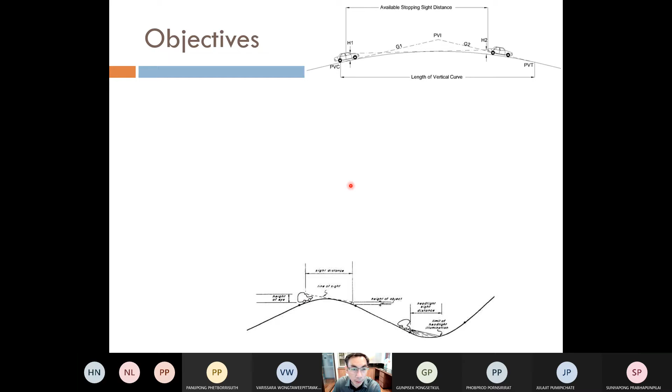Okay, describe the component of vertical alignment. What does it mean, the vertical alignments? It means when you drive the road, there are two kinds of alignments. The first one is horizontal curve, left and right, and another one is uphill or downhill. When you're changing the gradients, we call the gradient slope uphill or downhill, we call this one gradients. We use the G, okay?

For example, G1 is this car driving uphill, and they want to change to downhill, okay, G2. They change the gradients from G1 to G2. Rather than make it abrupt, for smooth traveling we just put in a curve. This kind of curve uses the parabola curve to connect between these two straight lines, the two gradients G1 and G2. We use the vertical curve by applying the parabola's equation.

So the objective of this topic: you should be able to describe the component of vertical alignments, understand the design criteria for vertical curve, and determine the minimum length of vertical curve.

When you have a longer length of vertical curve with the same changing percentage of gradients, compared to changing from G1 to G2 with a shorter length, you'll have a difference in sight distance. If you have a shorter length, you have a shorter sight distance. But if you have a longer length, you will have a longer sight distance as well.

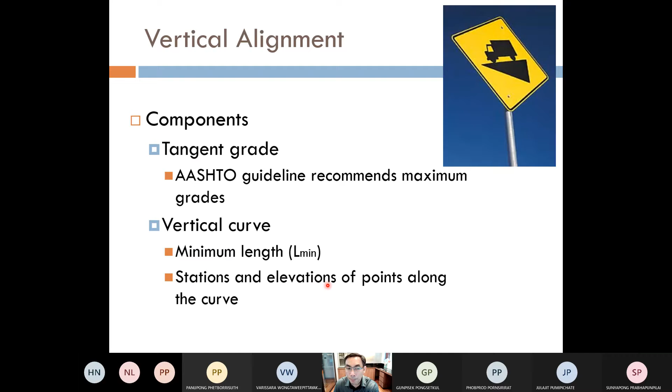Let's have a look at this picture. What do you think about this picture - do you know if this is downhill or uphill? They turn, of course they turn right. Okay, the vehicle goes straight from here, turns right, but is it uphill or downhill? Can anyone give me an idea?

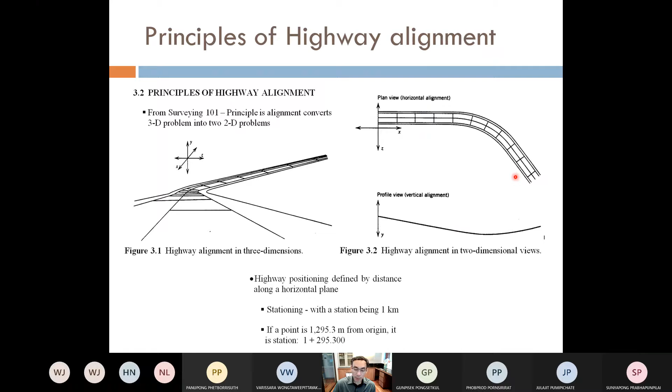The station of the vertical curve goes all the way on the x-axis, but the station of the horizontal curve goes along the curve itself. Therefore, the length of curve also represents the station along the horizontal line here. Any questions so far? Yes, in this picture, length is measured along the horizontal plane.

This is G1, the initial grade, and G2, the final grade, or final tangent, whatever you call it. The A absolute value is always a positive number because it's put in absolute value.

PVC is point of vertical curve, the beginning of the curve. PVI is point of vertical intersection, the point where they're changing the gradient. PVT is the final one, at the end of the vertical curve. Please keep in mind that this is a parabola, and after this point it goes to a straight line or tangent.

L is the length of curve in station, normally measured in meters, measured on a constant elevation, constant plane.

From this picture, the gradient 1 or tangent 1 here goes uphill, and the second tangent is tangent 2 or G2. You put the first curve here. This is a crest or sag curve.

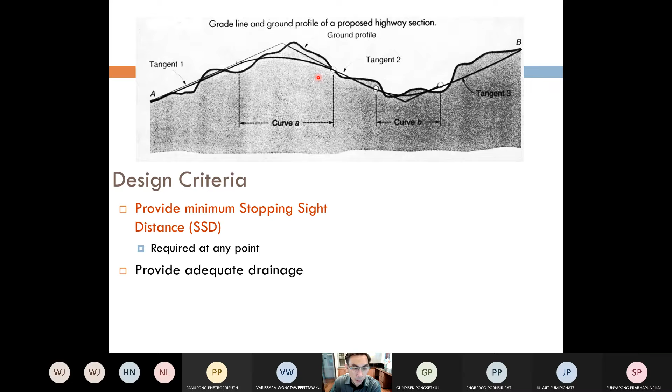Of course, stopping sight distance required at any point of vertical curve, provide adequate drainage, provide comfortable riding, provide pleasant appearance, natural topography, and environmental, also the good view. Okay, also related to the horizontal curve as well. The balance, you know, uphill, downhill, we have to cut earth and fill earth maybe quite equally. That is would be care.

Here, the example to find. You can see the line here. You have the solid line here, and you have the dashed line here. Okay, if you have a solid line, make sure that you cannot overtake it, but you maybe have enough distance to stop the vehicle before hitting the object.

How can we know that? It can be, if you drive the vehicle here, this is the driver eye height, okay? The height of maybe 3.5 foot above the surface. And they have another object. The object may be, they support the car stopping here, broke down vehicle stopping here, or the traffic jam here, behind the hill. You have enough distance to stop before hitting them. That's why they make the distance here 60 centimeter or 2 foot object height, okay?

And this is the sight line, okay? The line of sight that you can see the object. And the distance left here should be long enough for stopping vehicle. Suppose that your design speed of this road equal to 100 km per hour. If you drive with 100 km per hour, you open the table, how long does it take to stop the vehicle? It's 185 meters. So the distance left here should be minimum, or the length of curve should be long enough to have at least 185 meters on this curve. That should be enough for vehicle to stop before hitting the object.

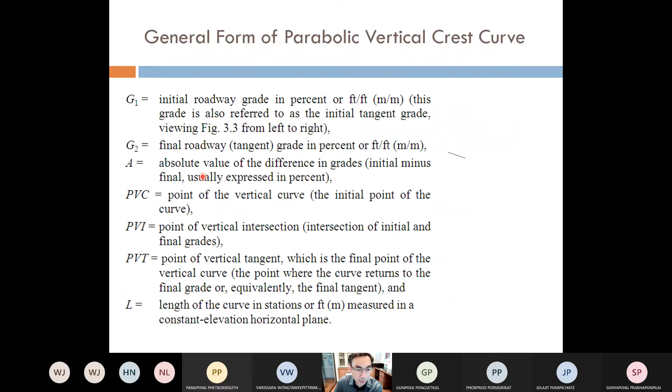For example, y is the elevation of any location or any station or anywhere, referenced from the beginning, PVC, okay? We start, let me see from here, from this picture. If we start from here, x equal to 0, okay? Along the horizontal plane, x starts increasing. When you want to know the elevation of anywhere, you put x in the equation, you will know the elevation from y equals ax squared plus bx plus c, okay? But the problem is, what is a, what is b, and what is c? That is the coefficients defined below, okay?

If you notice, we have the state right here, and then we start. The first point we call PVC, right? And what is this point? We call PVI, and we call this one PVT, correct? And we start putting the vertical curve here. My question is, if we start here, this equation y equals ax squared plus bx plus c, what does c mean when x equals 0? It means PVC, right? Elevation of PVC. Is that correct? If x equals 0, c equals y, and y equals elevation of PVC. Is that correct?

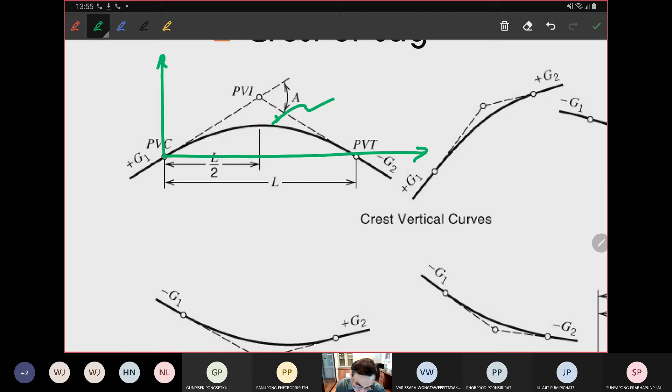Let's see this one, okay. This one is a parabola curve, right? Y equals ax squared plus bx plus c. This is x equal to 0, right? And the length of curve is L. I said if you want to know when x equals 0, y equals what? X becomes 0, what is the point?

Here, c. What is it? It equals c, right? If x is 0, c equals y, y equals c, right? Yes. Y equals c. And what does y mean here? Y means elevation of PVC.

That is the value of elevation of PVC. So if you know the elevation of PVC, you know that is C.

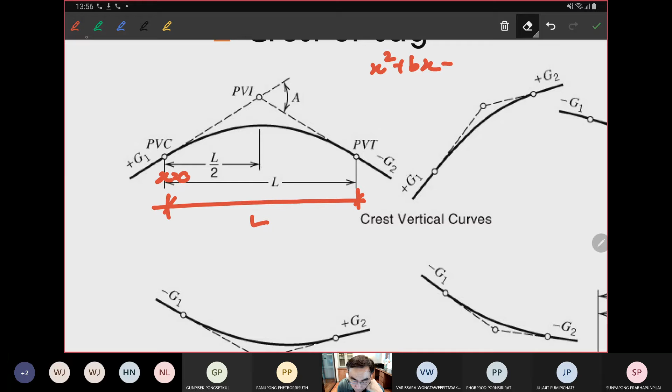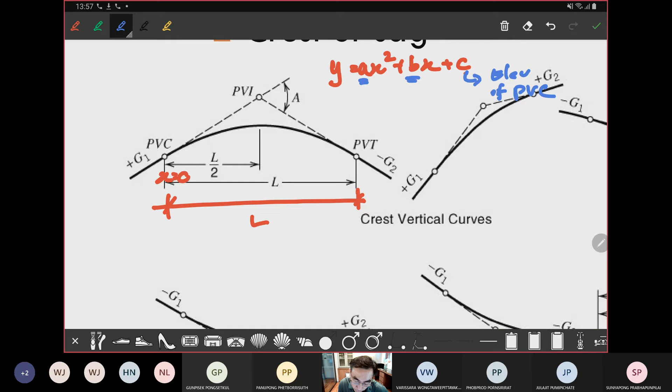C equal to elevation of PVC. Right now we want to find A and B. What does it mean, A and B? In the parabola, the slope - you know in calculus, first differential equation, what does slope equal to? dy by dx, right? And how can we find B and A? How can we do that?

How can we do that? I ask you, the slope here, dy by dx when x equal to 0, equal to slope, right? So at this point you know the slope. At this point, PVC, slope equal to what? Equal to G1.

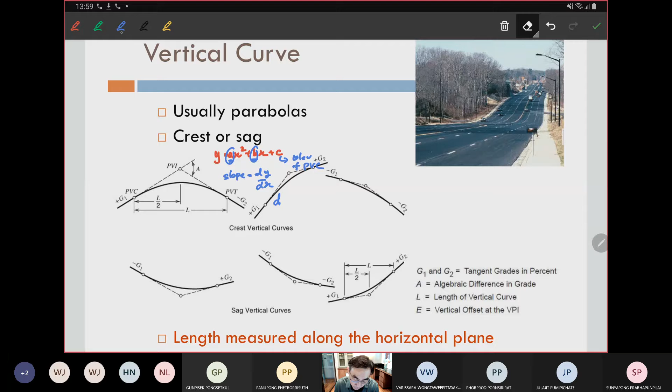If you can see from this slide, it's straightforward. Okay.

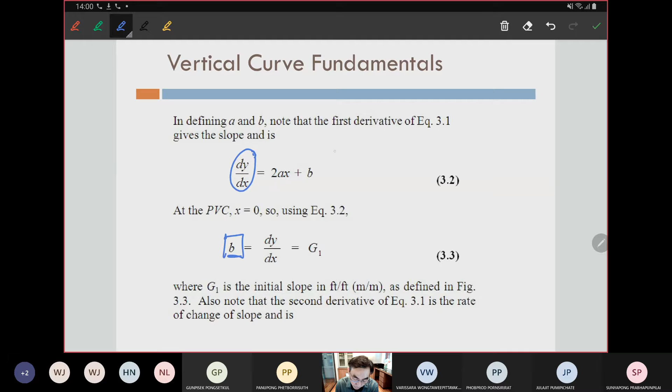You know the first one, C must be equal to elevation of PVC. We know C when x equal to 0, C equal to elevation of PVC. When we want to find out what does B mean, we just find the slope of the parabola curve. When we first make a differentiation, you will get 2ax plus b must be equal to slope, right?

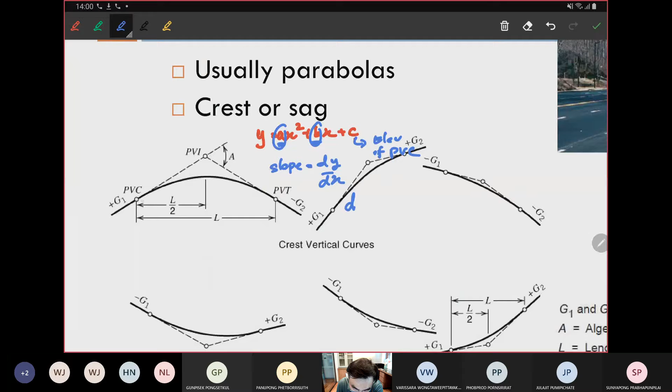If you see the slope here, you know only one point in the parabola. This point means what? This slope dy by dx equal to G1, and G1 equal to what from the first differential equation? 2ax plus b, at this point x equal to 0, so b equal to G1. The value of B will be equal to G1.

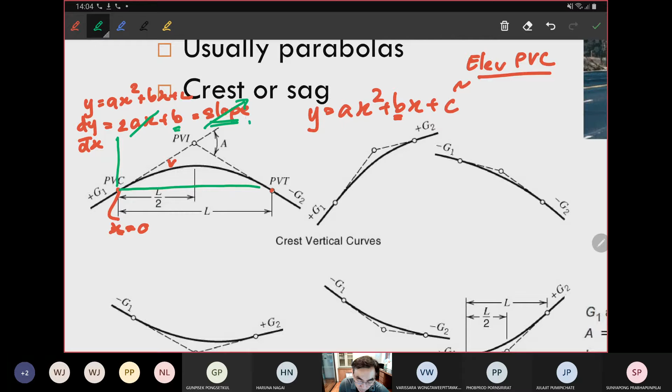Okay, so now we know B, we know C, we need to find A. We find B by using the slope dy by dx. But how can we find A is a little bit more difficult. We find it by using the second differential equation.

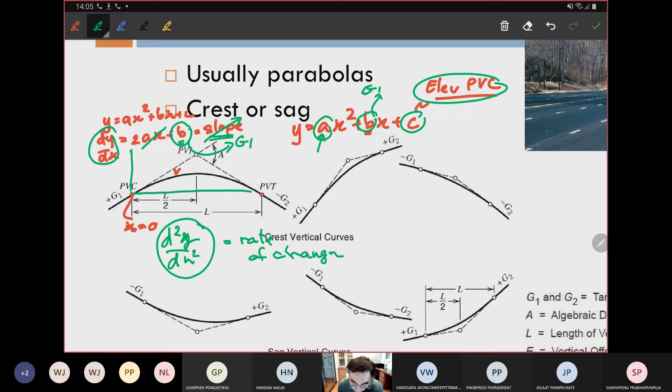dy by dx, differentiating twice - what does it mean? The second differential means rate of change, equal to rate of change in gradient. Differentiating twice, what's left is 2a. Rate of change means the change in slope, which is G2 minus G1 divided by the length. This is the rate of change of slope.

Compared to the range of the curve, this is the rate of change of slope, equal to 2a. Therefore A becomes G2 minus G1 divided by 2L.

So we come back to this page. B equal to G1. Okay, and the second differentiation equal to 2a, which is the average rate of change of slope.

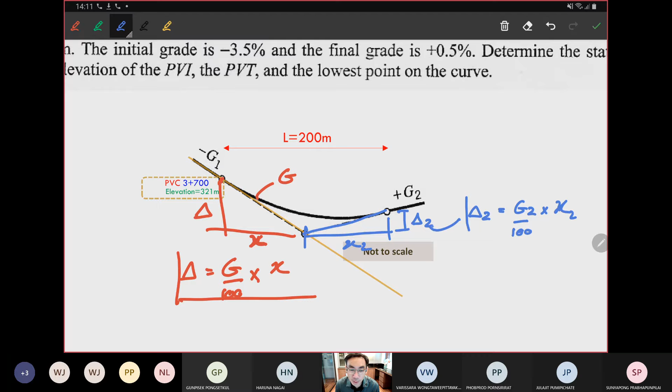Right, the blue one. If you want to know the difference in elevation here, delta 2, right? Delta 2 equals G2 divided by 100, multiplied by x2, the horizontal distance. You will get delta 2. Keep in mind this one, we use this a lot. Of course we will use this one in exam questions too.

So now you know this equation, parabola, for finding the elevation along the vertical curve. Let's start doing the first example.

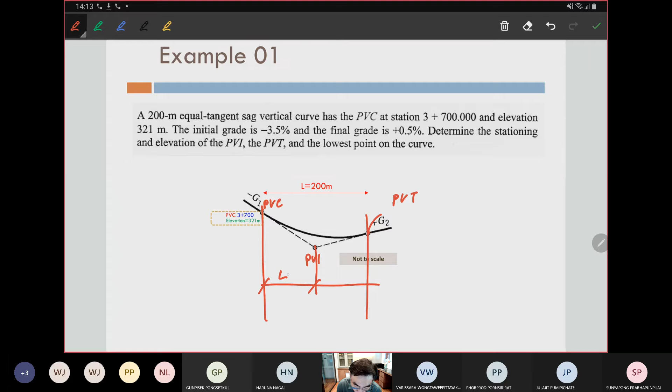Two equal tangents, yeah, let's add a bit more. We calculate this one, we say equal tangent, what does that mean? Here the start we call PVC, this is what we call PVI, and we call this one PVT. The equal tangent, from PVI to PVC equals L divided by 2, from PVI to PVT also equals L divided by 2, it's equal. This total L, reference from PVI to PVC equals the length of curve divided by 2, it's the half of the total length.

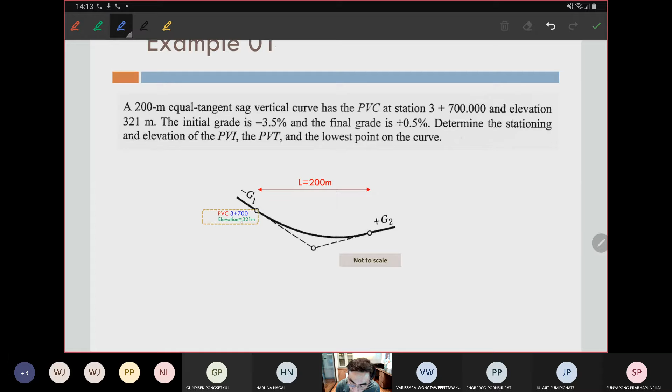This question: 200 meter equal tangent vertical curve. We have PVC station at 3 plus 700 and elevation is 321. The initial grade is minus 3.5 and the final grade is plus 0.5. Determine the station and elevation of PVI and PVT, and also the lowest point of the curve.

From this, very easy, I want to know the station of PVI and station of PVT. Anyone want to answer? Raise your hand. Who wants to answer the station of PVI and PVT? Can you find the station of PVI and PVT please?

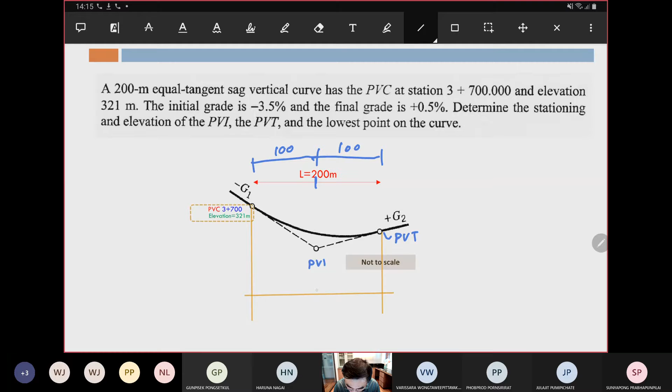No one? Okay, the total length 200, halfway means L divided by 2 is 100, left and right is 100 station each. Let's start the station right here. The total length is equal to 200, of course this must be 100, this must be 100. Therefore this is station PVC, meaning 3 plus 700. Station of PVI must be 3 plus 800, and station of PVT must be 3 plus 900. It's really easy, must be 900. Any question so far?

I want to know the elevation of PVI, equal what? Elevation of PVI equal what? Anyone want to answer? This PVI stays on the straight line, as I said, on a straight line, right? How can we find the elevation? Here, because we know this elevation, we find delta first. Delta equal to what?

Downhill 3.5, right? You said 3.5 divided by 100, multiplied by the horizontal distance, which is 100. So the delta must be 3.5. But right now we have, from reference from this point, 321 minus what is the elevation of PVI? Minus 3.5, 321 minus 3.5 equal what? 317.5.

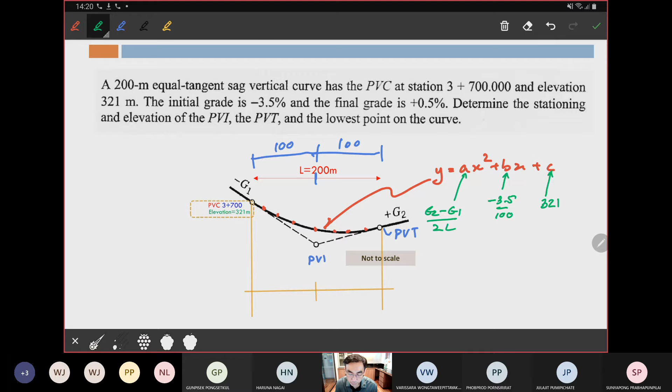Okay, so we're going to make the parabola equation. What is C equal to? That is the elevation of PVC, 321. B equal to what? Minus 3.5 divided by 100. A, what? So we get the equation of the parabola here, see on the next page.

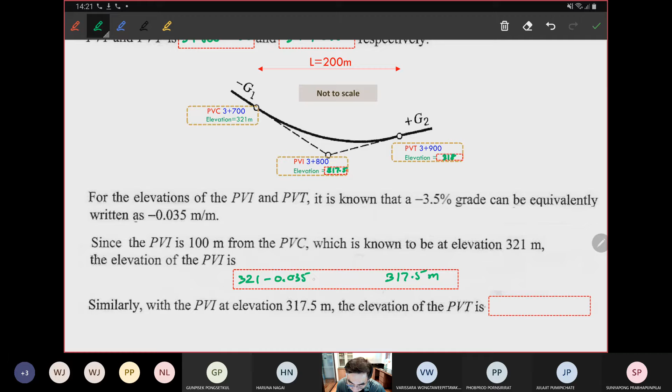So from this one, you will get PVI at station 3 plus 800, and PVT at 3 plus 900. Okay, now equation here, we get 317.5 and this is 318. Okay, the elevation of PVI we find already equals 317.5 meter, where is this from? 321 minus 0.035 multiplied by 100 equals this one, and elevation of PVT equals 318.0 meter, okay.

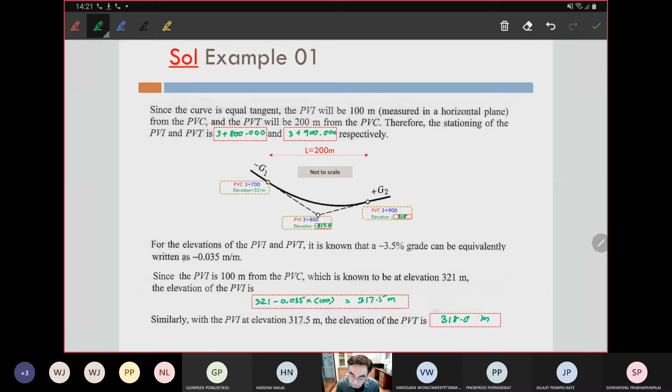So next we're going to find the equation of the parabola. B equal what? B equals G1 equals minus 0.035.

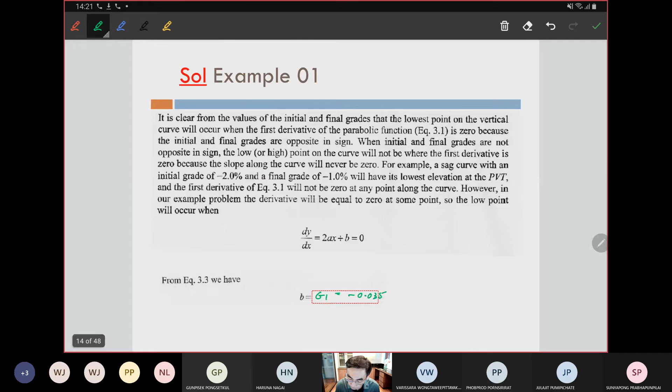Okay, what's next? A equal what? A equal what? Right?

2L. So A equal to 0.0001.

So we get the equation. What is the equation? Y equal 0.0001 x squared minus 0.035 x plus 321.

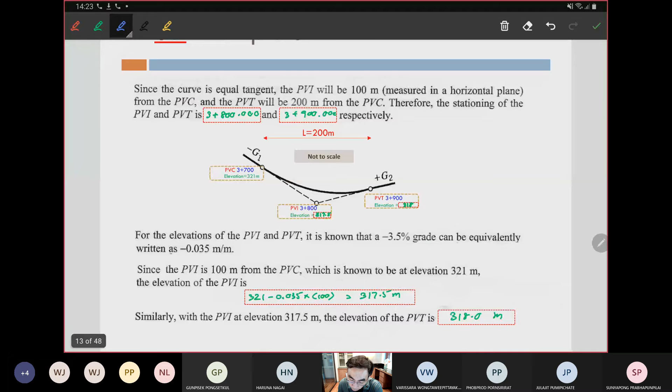These are the equation of parabola. When you want to know any location, the question also asks for what? Let's see the question: lowest point of the curve. What does the lowest point of the curve mean?

Here, where the slope equal to 0. dy by dx equal to 0. What is that distance, x, that makes the slope equal to 0?

If you notice from my slide, dy by dx, this means what? Can you...

2 times 0.0001 x minus 0.035 equal to 0. So you solve this problem, you will get x equal 175 meter.

Okay, when x equal to 175, this means the lowest point.

dy by dx. Okay, this is the same. These are the same.

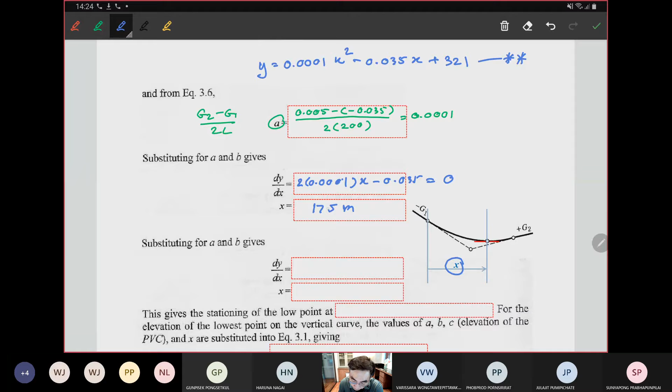This gives what is the station? Who wants to answer this one? What is the station at the lowest point?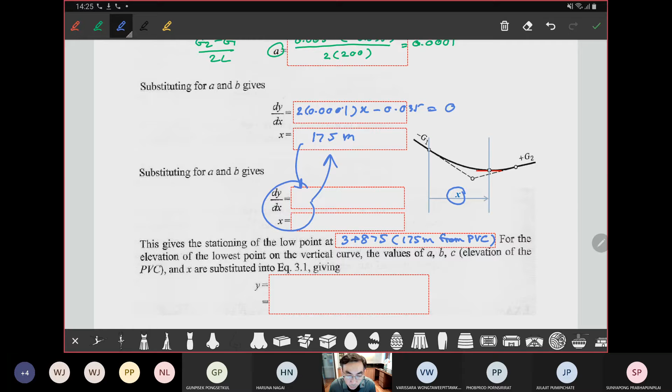So this asks for the elevation of the lowest point. You want to see the elevation of the lowest point. What is the elevation of the lowest point? Who wants to answer? Who hasn't got it? Let's go, extra point. What is the elevation of the lowest point of this curve?

No one? If no one, I will tell you the answer. You know that x equal to 175, right? You reach the lowest point. So you just substitute x equal to 175. This means 0.0001 multiplied by 175 square minus 0.035 multiplied by 175 plus 321.

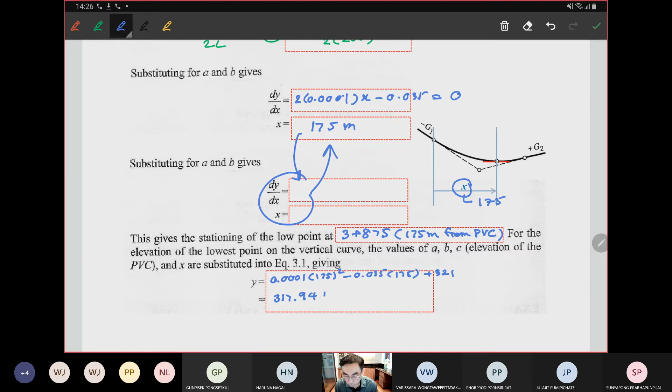Therefore, you will get the elevation of the lowest point equal to 317.94 meter. Okay, you can capture this one.

And then these are some kind of exam question, asking you to know the elevation of each station.

Okay, the elevation here equal what? You can find that 318.5. Okay, 317.94. You go back and work it out, solve it by yourself. You should get this kind of number.

Nothing difficult at all. As long as you know this start point we call PVC, and this one we call PVI, and this one we call PVT.

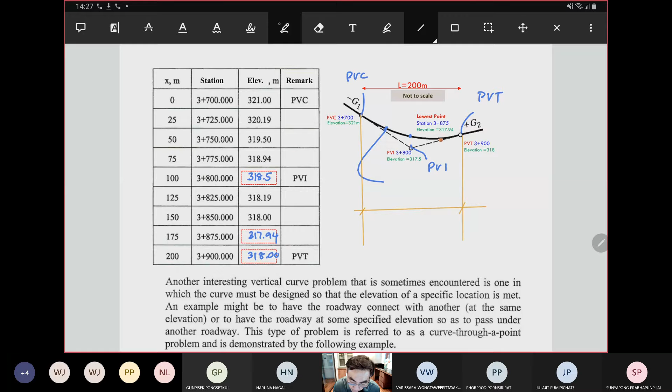Okay, and also you should keep in mind that the station of this curve we measure along the horizontal, from here to here. And the station we also start counting from here, x equal to 0, every 25 meters based on this distance, and you just put the elevation here. Every 25 meters you will get this curve.

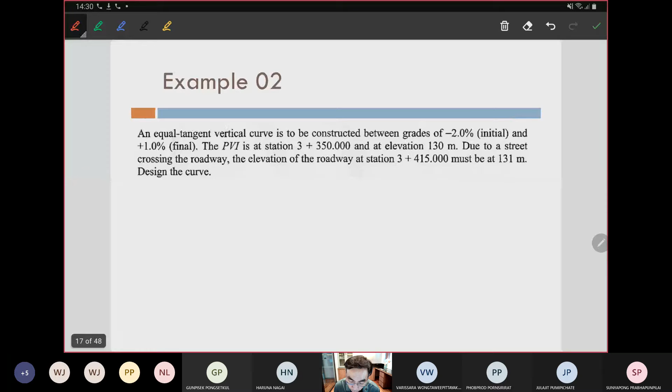Okay, we still have very short time left, I'll just keep continuing. I think you know the basics already. I will switch back to my PowerPoint, writing is maybe not good for me. Okay, let's go back here, give me more time before we break.

Let's go to the second question. An equal tangent vertical curve is to be constructed between the grade -2 initial and going to another +1. Is it crest or sag? Crest or sag vertical curve, anyone can tell?

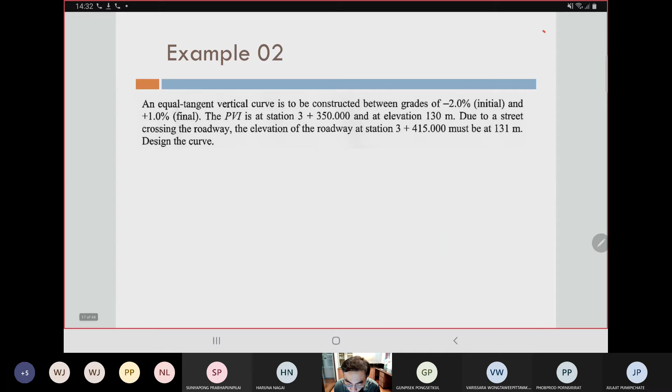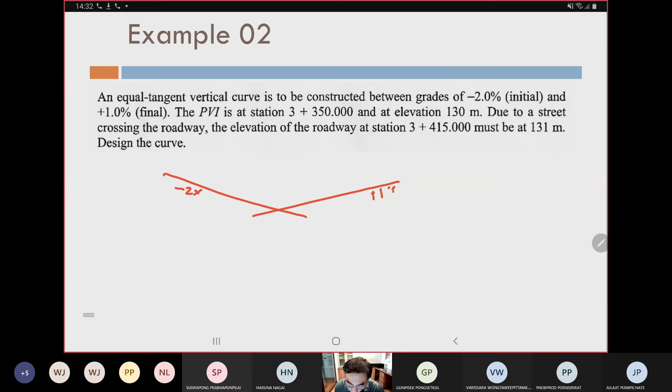Okay, when you read the question, do you understand what that means? That one grade when you decide one is -2, and +1. So -2% changes to +1%. And also, it's telling you that there is a PVI station, at station 3 plus 350. And it's telling you that the elevation is 130 meters.

Okay, so this is the PVT. When they cross each other, what does it mean? It means the elevation here equals 131. What can happen at this location? At station 3 plus 415, there are two roads crossing each other. What does it mean? It means there is an intersection there - it will create a four-way intersection.

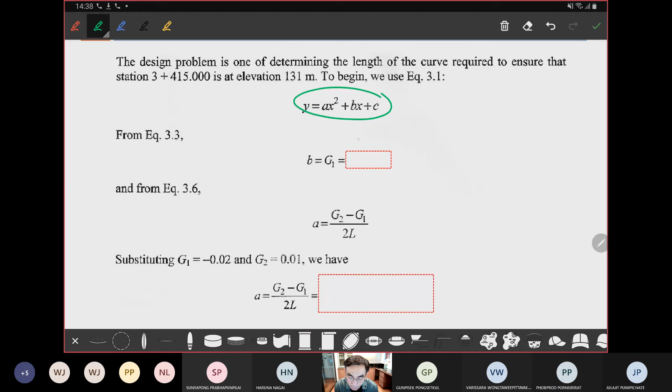So we use the equation y equals ax squared plus bx plus c. What is b? B equals G1, right? G1 equals -0.02 minus... wait, G1 equals -0.02. A equals G2 minus G1 divided by 2L. G2 equals 0.01 minus G1, divided by 2L, equals 0.015 divided by L, okay?

So write down this one first, okay.

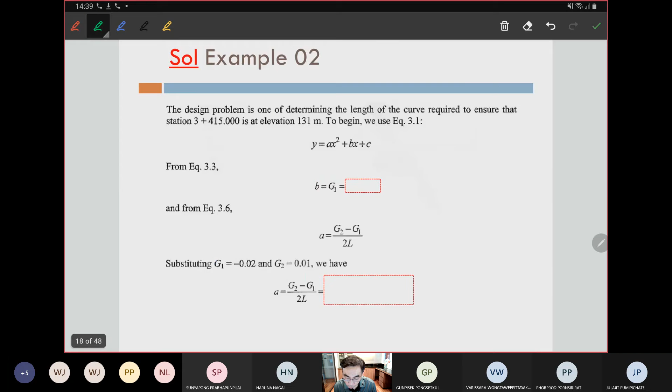What is the elevation C? Does anyone know that? C here is the elevation of PVC. How can we know the elevation of PVC?

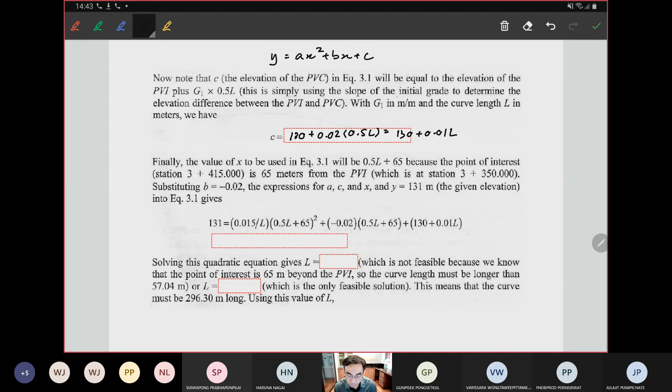So the equation you get is y equals ax squared plus bx plus c. There is one point where you know the y value - only one point along this road, here is the point where you know the y value, is that correct? I'm asking you, do you know x? If you know x, you know a, we know b, we know c, right, at this point.

We know y equals 131. Do you know x at this point? X equals L divided by 2 plus 65. We substitute this x into this equation, so we will get this one.

This is y, right, y at the intersection point. This is a, this is b, and this is c, and also this is x, this is also x, this is x squared.

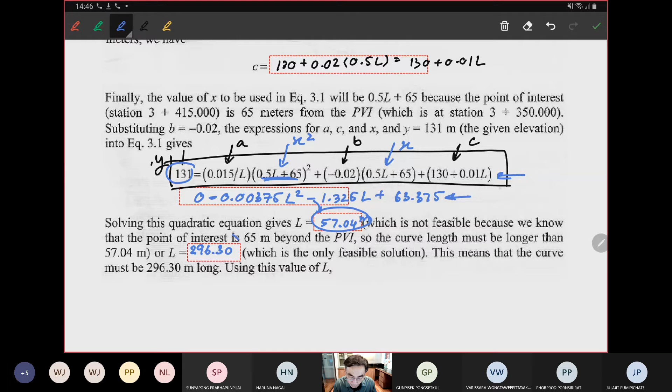Can anyone solve this equation? We got 57 and 296.3. So the teacher asks: we got two answers, which one should we choose as the length of curve?

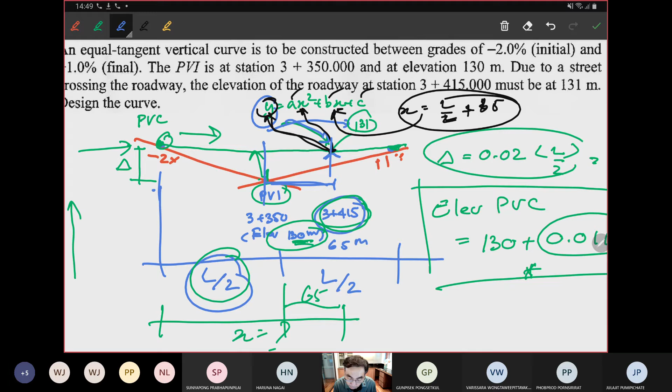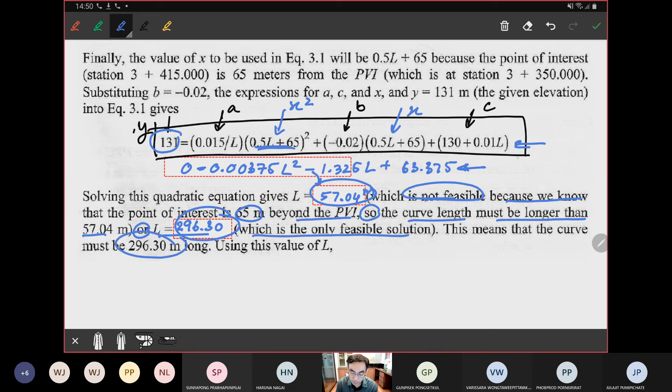This is not feasible because we know that the point of interest is 65 meters beyond the PVI to the intersection point, so 57 meters is not possible. So the curve length must be longer than 57.04, or L must equal 296.3, which is the only feasible solution. Remember, if you encounter a quadratic equation, you must get two answers first, then choose which one is correct and which one is wrong. This means the curve length must equal 296.3.

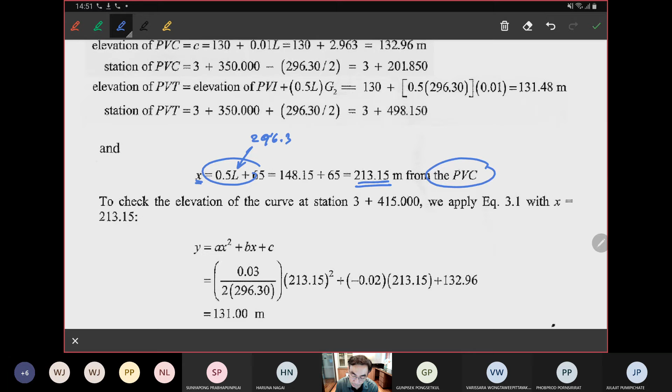So you can know the location of PVT, station PVT, as a final check. At location x equal to... substitute L equal to 296.3. X should equal 213.15, that is away from PVC, that is the station where we have the intersection there.

And to check the elevation of the curve, you can substitute x equal to 213.15 in this equation. You will get the same answer, 131. Okay, this is the final check that all the calculations have been done correctly.

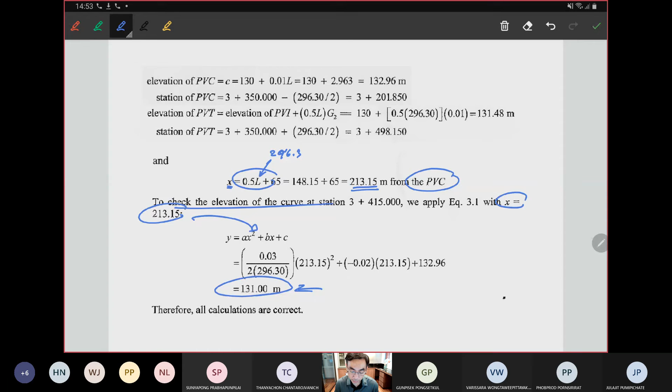We will not use the equation y equals a x squared plus bx plus c necessarily; depends what the exam requires. Another popular method used worldwide is called the offset method. The offset means reference from the first gradient line, G1. The distance that differs from G1 to the surface of the road anywhere around the road, we call this the offset.

The value of offset we use y. The equation to find y equals ax squared divided by 200L. This is the general form of the offset value.

So if you want to know the elevation at a certain point, you need to know the elevation at point A first, then subtract by offset Y. You will get the elevation of the road at position A. The elevation along the first tangent, gradient G1, is easy because it equals slope multiplied by horizontal distance, as I told you before. Everyone needs to remember this equation: y equals ax squared divided by 200L.

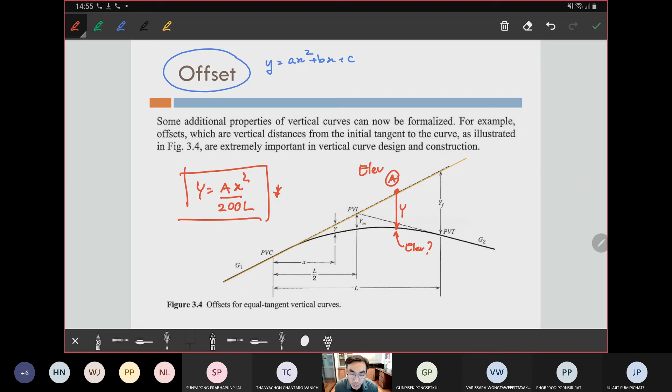Of course we have the special one, Ym, from PVC to Ym, which is from PVC to PVI, the distance from PVC to PVI equals L divided by 2. We put L divided by 2 into x: L divided by 2 squared divided by 200L. What happens? L and...

Ym equals AL divided by 800. Another one, YF, the final one: x equals L, you just substitute L in this equation, and therefore YF equals AL divided by 200. So you will get this equation.

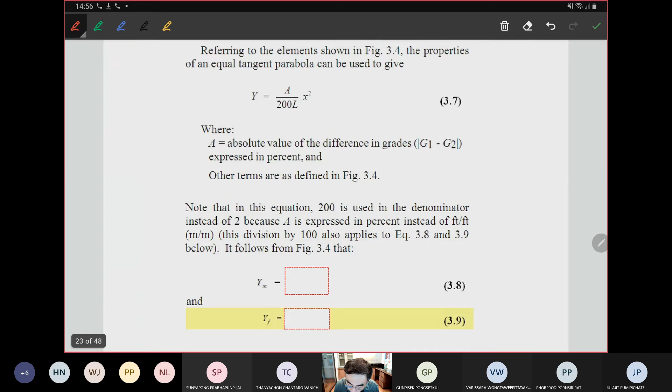Ym equal to... remember these three equations: 1, 2, and 3.

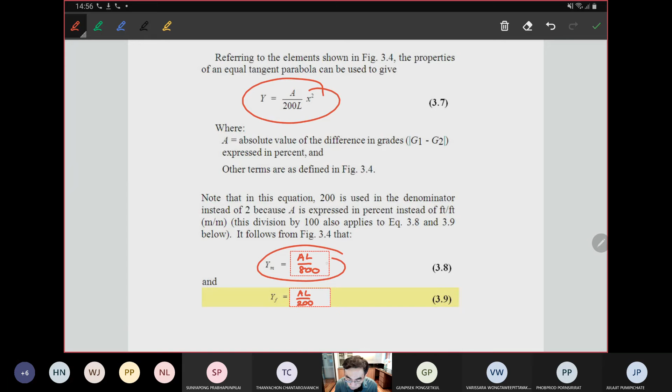We have another important value, the K value, used around the world. The value of K is related to the length of curve. K equals L divided by A, or we can say L equals K multiplied by A. This is the length of curve that we want to know.

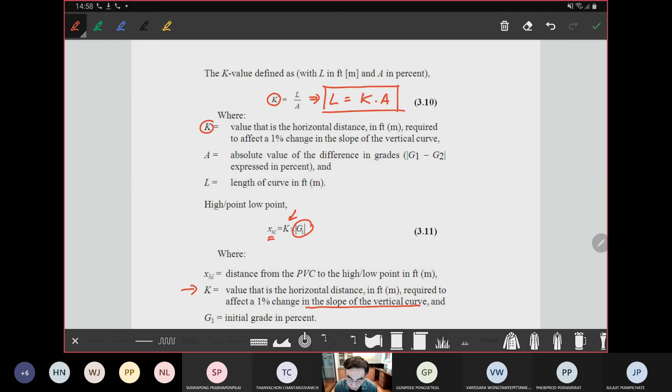Also, a special thing about the K value: you can find the distance to the lowest point or highest point very easily by using K multiplied by G1. You will get the lowest point or highest point immediately. What does K mean? K value is the horizontal distance in meters required to affect a 1% change in the slope of the vertical curve. Let's see this one.

And we can go to the next exam question, really close to an exam question. You should be able to handle this question first. The vertical curve crosses a 1 meter diameter pipe at right angles.

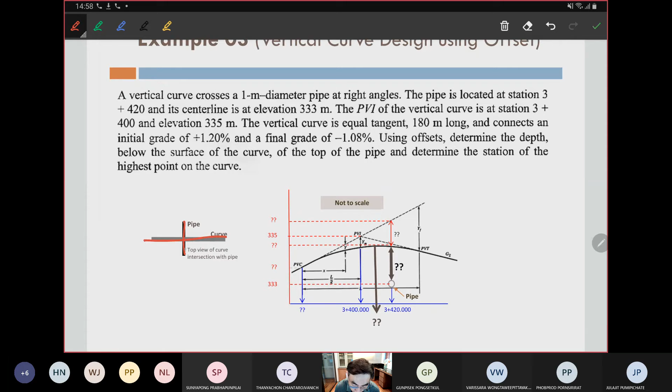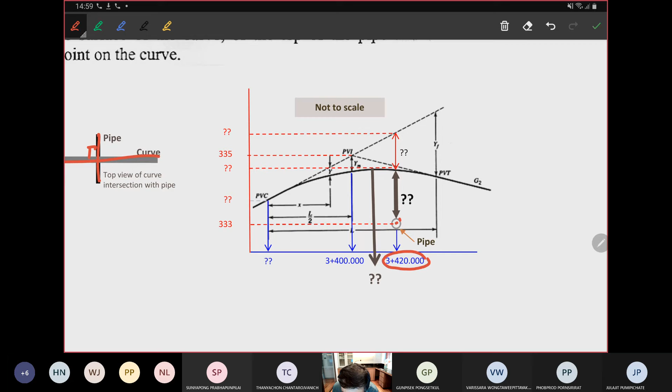The pipe goes underneath the curve, just above, making a 90 degree angle. The vertical curve crossing the 1 meter diameter pipe at right angles. The pipe is located at station 3 plus 420. Here is the pipe, the station of the centerline of the pipe is 3 plus 420.

At its center line is at elevation, also telling the center line elevation. pipe equal to 333. The PVI of the vertical curve is at station 3 plus 400, and the elevation of the PVI equals 335. Center line of pipe is 333.

The vertical curve is equal tangent. Left and right equal to L divided by 2 from PVI. The equal tangent is 180 meters long, with initial grade plus 1.2% and final grade minus 1.08%.

Using the offset method, determine the depth below the surface of the curve up to the top of the pipe - from the road surface down to the top edge of the pipe, what is the total distance. Also determine the station of the highest point of the curve, using the offset method.

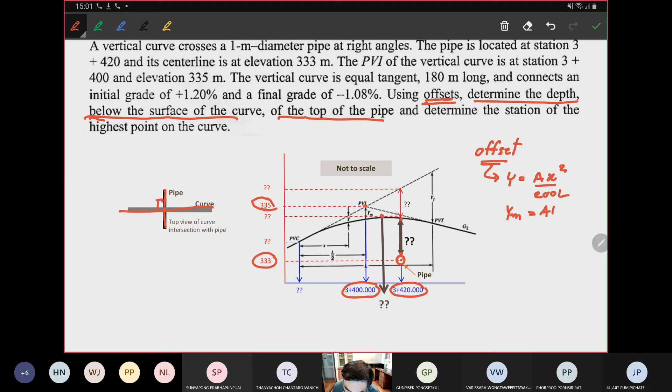Let's think about it, how can we do this one? Does anyone want to think about how we can solve this? Let's think together, okay?